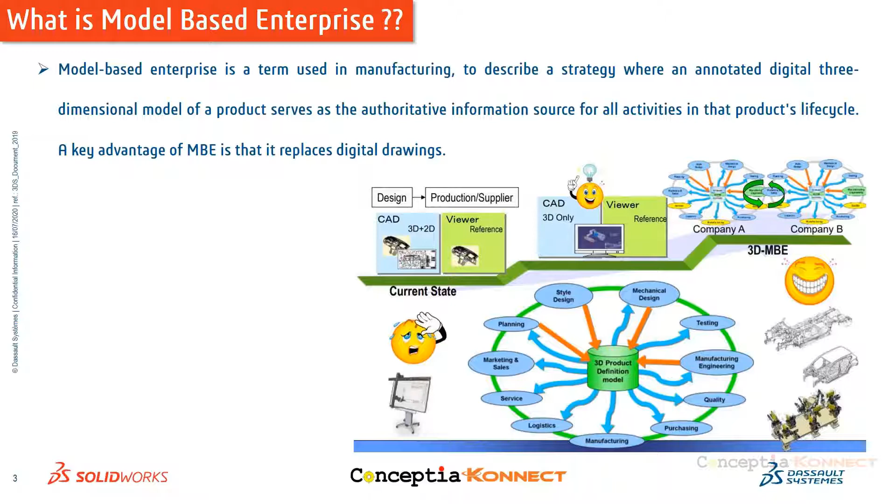So what is the importance of digital product information in a model-based enterprise? What is digital product information? Basically, if you take up your 3D model, what you're designing, the basic process is like this: say you take up a product design process, you're going to prepare a 3D model. Then once it's done, you're going to do some kind of drawings as well, which is digital product information. But what exactly is digital product information?

Whatever you're going to put onto your 3D model, rather than creating a 2D drawing or drafting or engineering detailing, you can right away put all this information in the form of detail into your 3D model itself. So this 3D model with all the product manufacturing information can be digitalized and taken forward for different processes. You can reduce a lot of time here.

How can you reduce the time? Let's consider an example of a design department. Say there are a couple of people, one working on modeling and one working on detailing. Rather than invest money on a couple of people to complete tasks on time, what we can do is have the modeling guy, the designer who prepares the 3D model, right away embed all the product manufacturing information into the model, making the process more efficient and versatile.

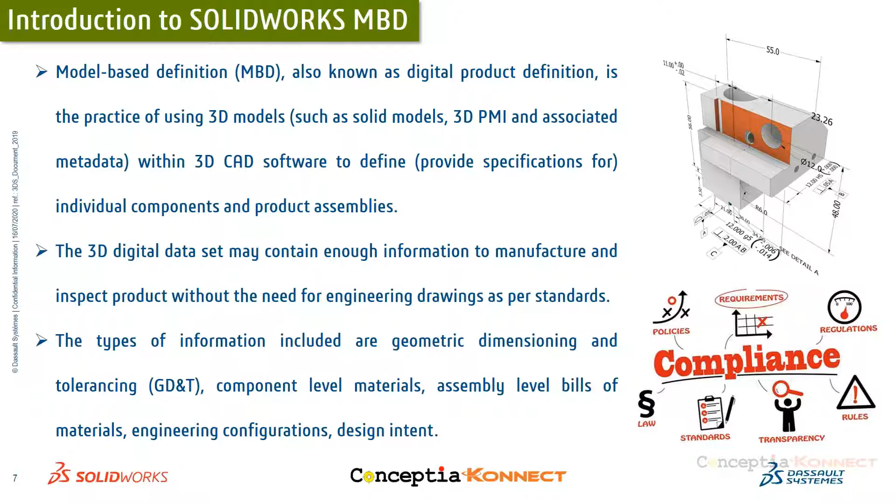So this is one instance where I'm going to show you how exactly we'll be able to create a 3D PMI.

With the automatic dimensioning scheme what we have here, we can select the parts datums considering how it has been assembled, and also constraining its degrees of freedom to ensure that we grab up the information that is required from a model just by selecting the features with a single click.

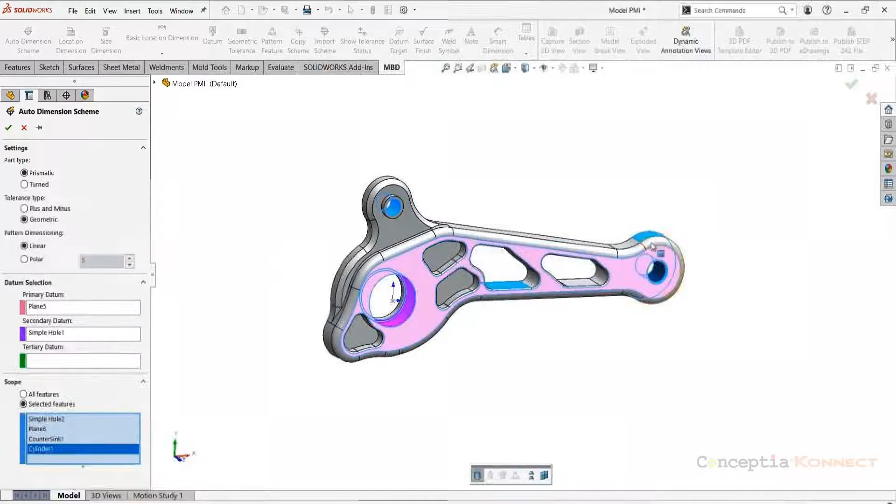As you can see here, when selecting the datums, and if you just click OK, all this information with the help of a GD&T is generated.

You can capture this in the form of 3D views, which can give you a high level of engineering detailing with all the cross-sectional details and all this information as well.

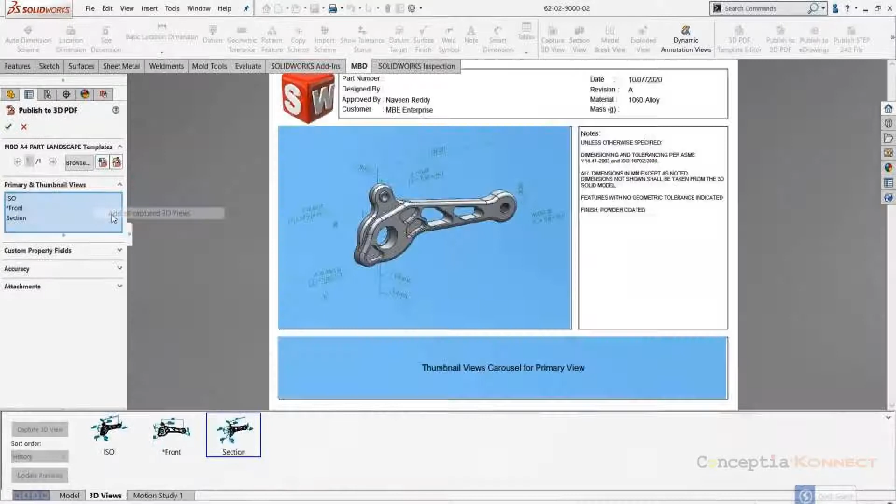Once you have done it, you can publish it in the form of a 3D PDF, which gives you information on how exactly the manufacturing notes have been added, what are the custom properties that we have taken into consideration, and what are the different views that we've added.

If you come to the custom properties, you'll be able to even make traceability as well, where you can check who has designed it, who has verified it, what is the part number, what is the project number.

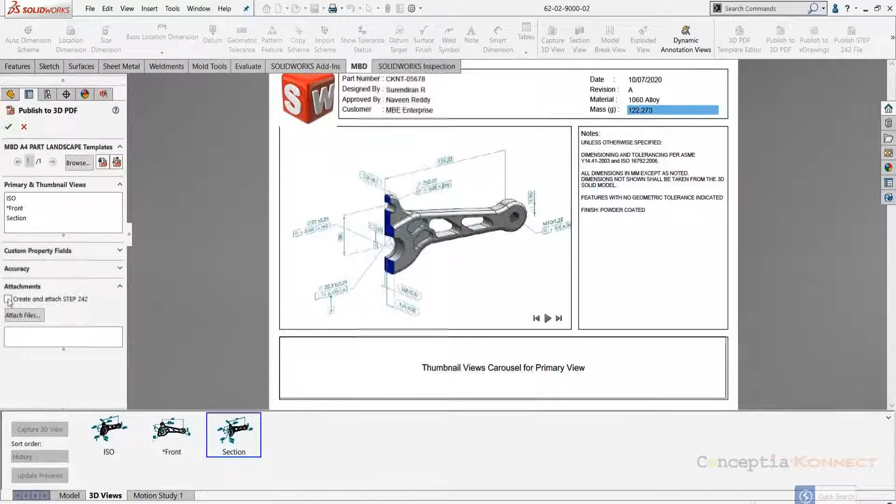All this information can be easily brought in, and of course it is not only limited to that. You will be able to even attach a STEP 242, which is an industry standard based format, which can be helpful for you to communicate with the further process as well.

So it can also give you a visual cue with the full screen mode as well. This is how you'll be easily able to generate the things.

The one more way is, for example, if you have an eDrawings viewer that is available with SolidWorks, you'll be able to easily open the 3D annotated model that you have here. As you can see, I'm just opening this model here.

You'll get all this 3D product manufacturing information on your screen easily. With this, what you can do is switch to different styles.

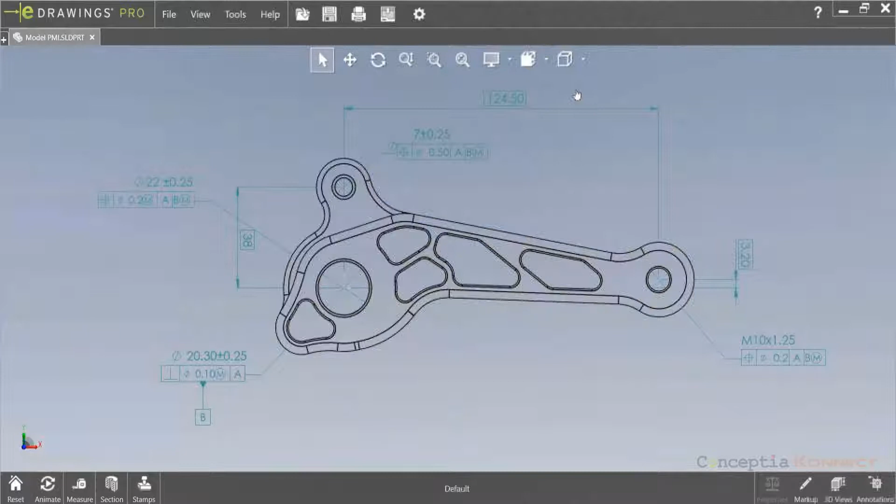Not only with this, say for example, if you want to make some kind of design review or something like that, it can be digitalized, where you can see I'm adding a comment saying design change required. Once you have done it, automatically you can place the arrow mark where exactly you want to place it.

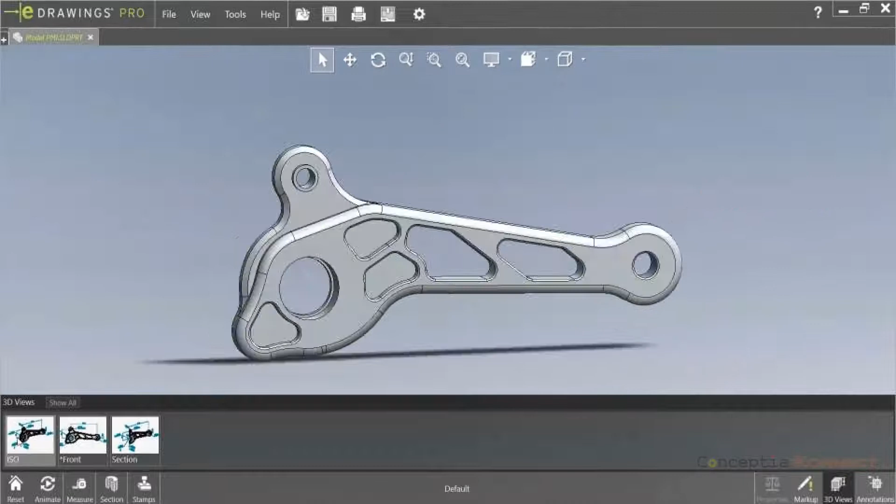Once you have done it, whatever 3D views that you have generated in your model based definition can be replicated into your eDrawings, making sure that you can operate everything on your tabs or computers as well, rather than using papers.

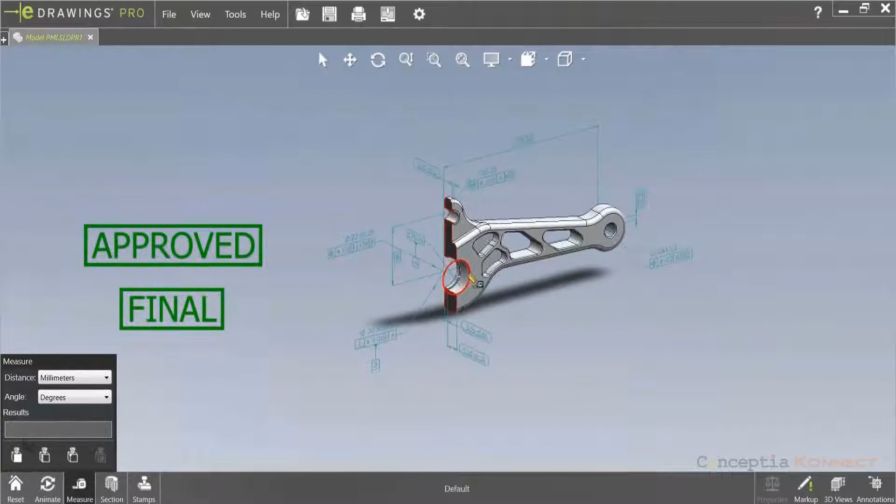And of course, if you want to add some kind of stamps, like it might be for design reviews or approvals, even that can be quickly done. At any point of instant, if you want to make some measurements, it can be done easily.

That is all about how SolidWorks MBD can help us define 3D product manufacturing information onto a model, and how we'll be able to communicate it—whether with respect to e-drawings, 3D PDF, or STEP242. All these are industry-specific standards. SolidWorks offers provisions wherein you can easily export using the direct exporting options within the interface.

Now let's see how SolidWorks MBD is going to power a model-based enterprise. If you take up this chart, you can see there are 5 different divisions. The first is the model-based enterprise at the top, followed by what it's about—starting with model-based definition, MBD.

MBD gives you information regarding your product, like manufacturing information, GD&Ts, 3D annotations, general profile tolerance, or concentricity. All these GD&T symbols are there.

Once you've defined all these things, the next process is about communication—whom you're going to communicate with. You're going to send it to different departments, for design reviews, or for example the semantic STEP242, as I showed you.

It's going to be helpful for you in the technical documentation process as well. E-drawings can give a visual cue wherein your manufacturing people at the floor can easily understand all the 3D models with the PMIs much better. That's how the communication gap between design and other departments is bridged, using suitable sharing formats to get all the necessary information.

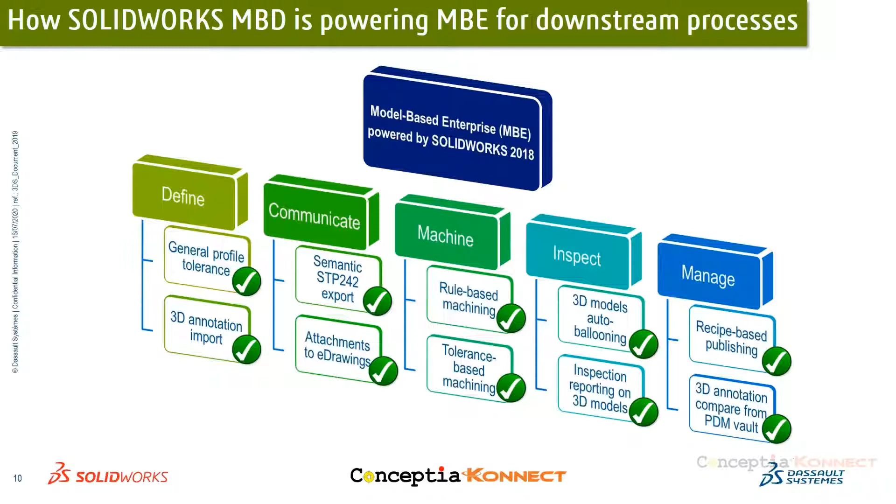So these are the solutions we have from SolidWorks for model-based enterprise. What exactly is it? First, let's see SolidWorks Simulation.

I didn't tell you anything about SolidWorks Simulation in the previous slides, but if you take up the concept of model-based enterprise—or if you're trying to implement it in your organization—it's very important that even before carrying out the rest of the operations in the product life cycle, you need to validate your product.

The SolidWorks simulation can right away be associated as an add-in, followed by which once you have validated, you can go to the manufacturing with SolidWorks CAM, and once you have manufactured, you can go with SolidWorks Inspection for inspection processes like QA and QC process and the product control area.

And once you have done it, you will be able to create technical documentations, for example assembly instructions. There are organizations across the globe wherein they share the product manufacturing information in the form of a .smg file, where you will be able to gather information in your technical communication tool as well, which can help for both manufacturing and assembly.

Finally, e-drawings and STP files can easily be associated with SolidWorks, wherein it can communicate things in a much clearer way. Finally, SolidWorks PDM is a tool which gathers all this information and keeps it in a single area, with information on all the versions and revisions that we place for a product at any stage across any process in the product life cycle.

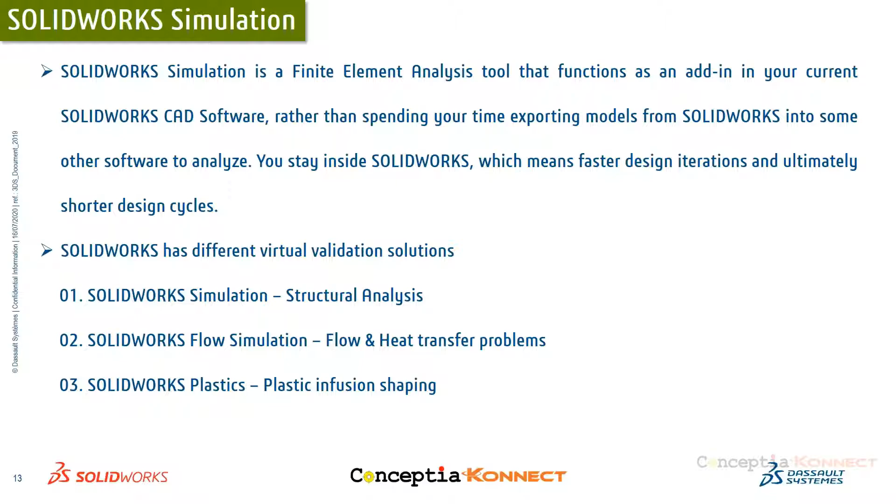Let me take you through a segment with a small example of how exactly we can perform topology optimizations or design optimizations, to ensure how SolidWorks can be a great tool for you to automatically optimize your shapes based on the strength and weight criteria, and get the necessary stresses and strength factors induced in your model during its operation. So this is one example here.

This is the same example which I showed you earlier - here you can see the link part I showed earlier. So here in SolidWorks simulation is an add-in. I'm going to perform a topology study here. Let us see how exactly I'll be able to optimize it without any manual intervention.

Here we'll be able to define all the restraints and constraints required for analysis. So at any point, if you change the model in your design interface, automatically it will be updated here within no time.

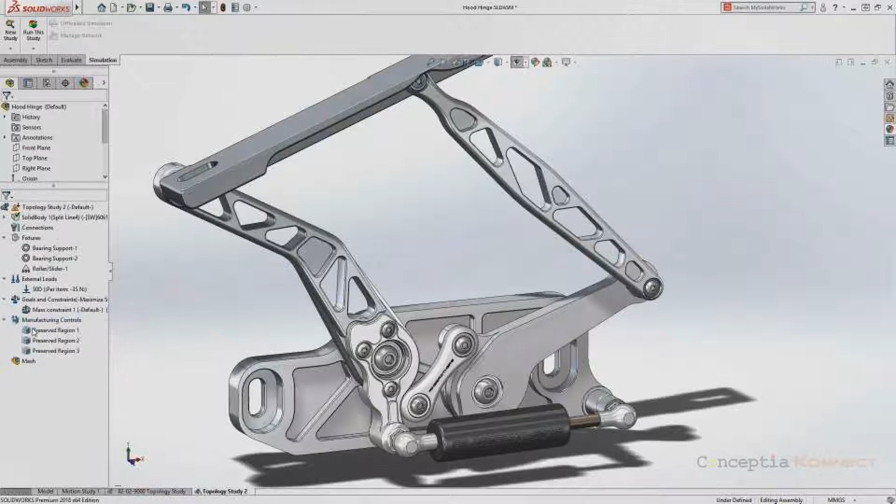And again, if you take up these different types of options for topology optimization, say for example, if you want to maximize the strength of this arm, even that can be done. And of course, if you want to preserve some regions into your model, making sure what kind of result you are expecting here as well.

The tab you're seeing down is the design optimization tab, wherein you will be able to get the load case study, the different types of loads, and finally you can see this is the optimized shape that we have here.

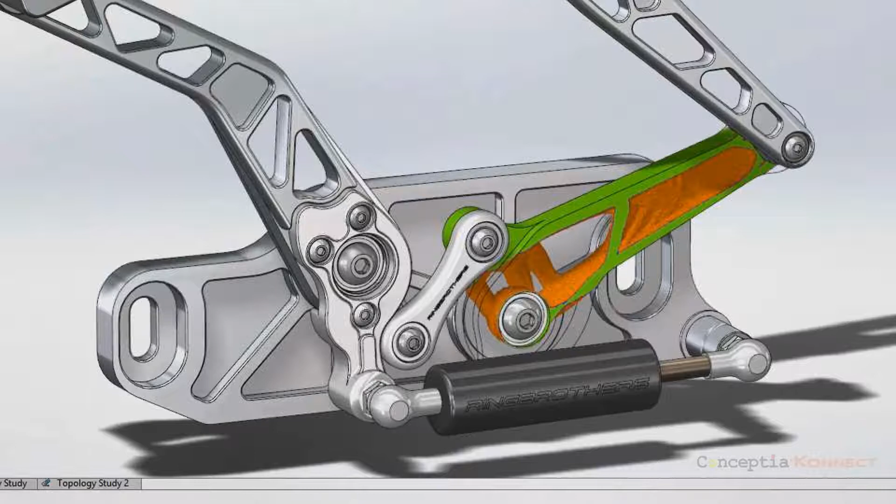And this can be shared in the form of a new configuration in your SolidWorks CAD interface, making sure there is no requirement of a new model to be created. And of course, finally, once you have done this, you can see with all the color coded depiction, you'll be able to find the stresses and different strength factor results as well.

So next, moving further, is about SolidWorks CAM. This is the manufacturing solution that we have here. So even though we know that we have a 3D model, we'll be able to generate the CAM program. But the concept is not about generating the CNC program here, it's about how you're going to maintain the tolerance and precision.

So with SolidWorks CAM, we have a concept called tolerance-based machining. Tolerance-based machining basically grabs all the 3D product manufacturing information and tolerances from your 3D model right away. It tries to extract all the machinable features available on your model, and from this information it automatically generates the programs. Let's quickly take a look at how SolidWorks CAM can be a great tool.

Also, I'd like to give insights that SolidWorks CAM is a 2.5 axis milling tool and also a 2 axis turning tool, where you'll be able to perform all the manufacturing activities like generating CNC programs and creating process plan sheets, and of course making sure that you have an integrated interface for CAD and CAM as well.

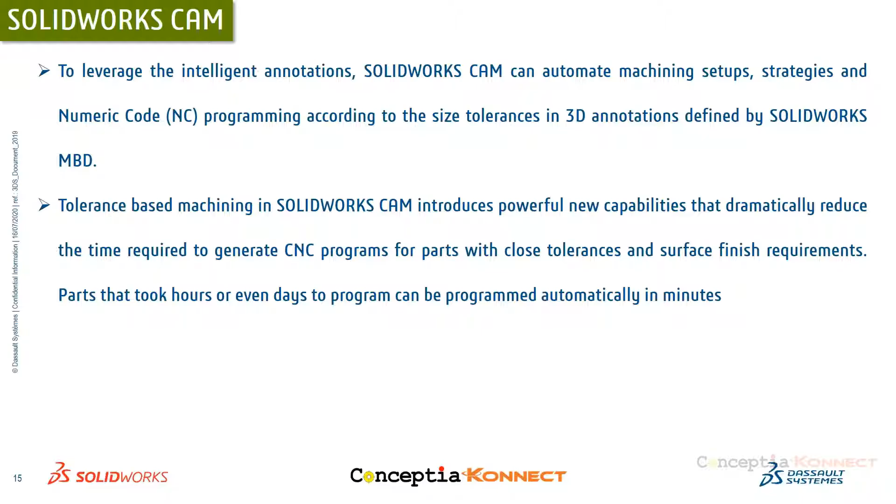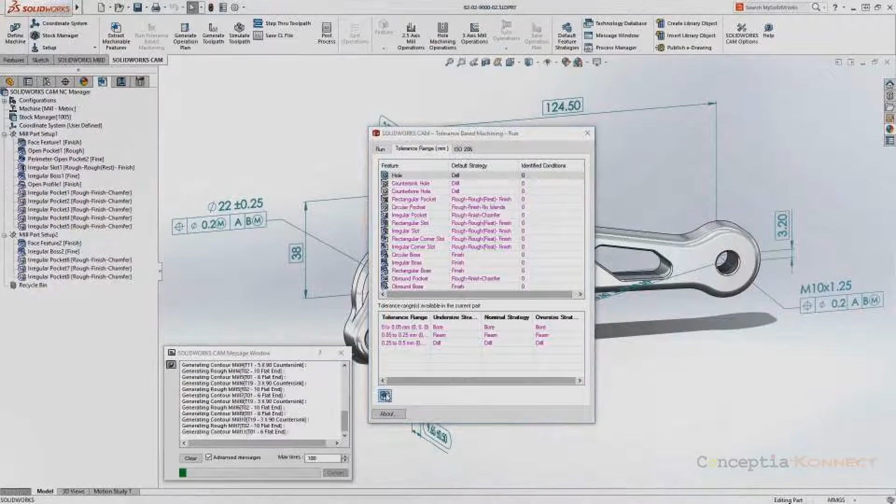So in this segment, say for example, I'm going to pick the particular link part here. I have defined all this 3D product manufacturing information here. SolidWorks CAM, being an integrated interface, has an option called run tolerance-based machining, wherein with a single click, SolidWorks will automatically extract all the machinable features. You can see all these necessary features have been extracted onto the CAM feature tree.

At any point, you can see I'm going back to the CAD interface. I'm going to change the type of fits that is required, and not only that, I'll be able to even change the other dimensions with different types of tolerances as well. You can see how easily it has been reflected here.

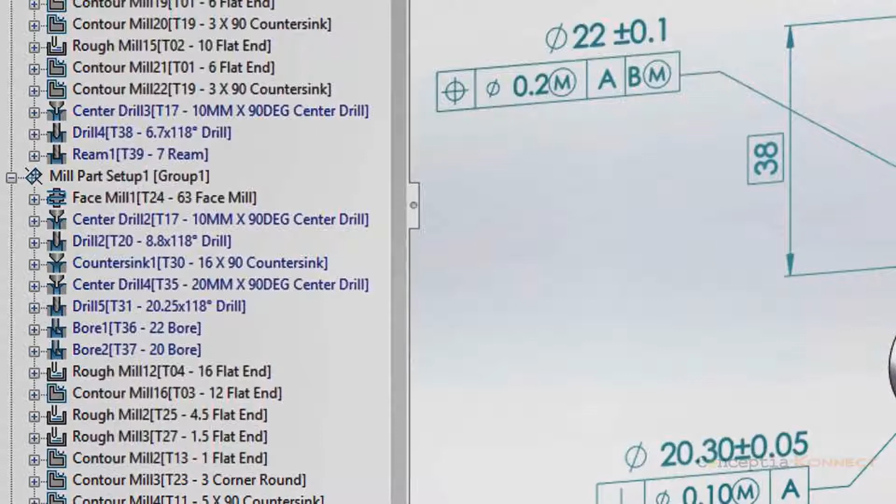And again, coming back here with the direct integration we have for CAD and CAM, SolidWorks will automatically be able to extract all this information, and easily grab the tools required for the toolpath simulation as well, wherein all the toolpath simulation can be easily performed to ensure you get the product right without any glitch.

So next is about SolidWorks Inspection. As you all know, once your manufacturing is done, how exactly are you going to inspect your product? If you take up an inspection process, it serves two purposes: one is product control, and one more is process control.

SolidWorks Inspection is a product control tool which helps us generate balloon drawings, and of course the first article inspection reports as well. So it is not only limited to parts here.

SolidWorks Inspection acts as a powerful tool for both SolidWorks parts and assemblies, wherein once you try to define your 3D product manufacturing information in MBD, the same can again be integrated on the same interface for creating ballooning, and of course you'll be able to generate all this necessary information as well.

And SolidWorks Inspection being a standalone application, it is not mandatory that you need to have SolidWorks installed. You'll be able to work on SolidWorks Inspection even without SolidWorks. You'll be able to import different types of CAD parts, like PTC Creo parametric files, CATIA part files or CATIA drawings, Creo files, or 3D XML. All these files are accessible into this SolidWorks Inspection standalone application environment.

Let me quickly take you through a segment wherein we'll see how you'll be able to do the ballooning and report generation with a 3D model. So again, considering the same example, the link part, let's open this particular part here - the SolidWorks Inspection is again integrated onto the same interface. You can see here, this is the CAD interface, and we have different views here. At any point, if you want to create ballooning, you can go ahead and start with a new inspection project here.

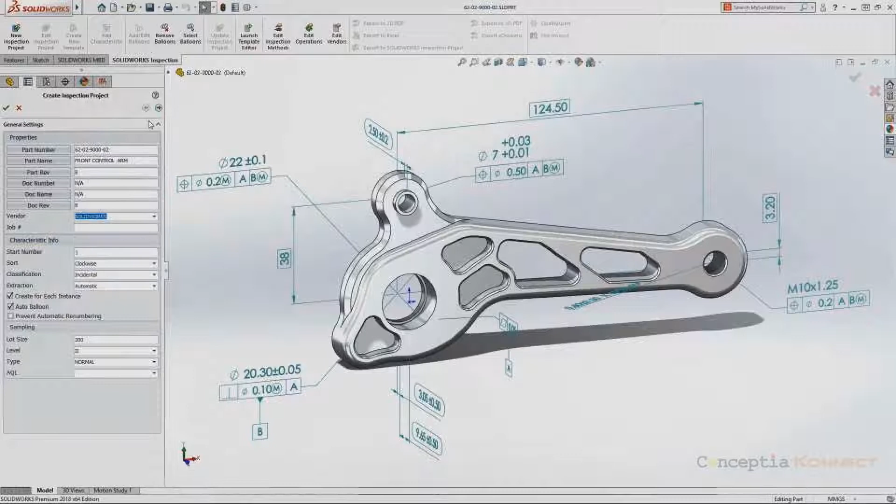Here we will be able to customize it according to different industry standards, and different information can be added, like different types of vendors, operations, manufacturing process. All this information can be easily gathered. As you can see, the balloons are created within an instant of a minute.

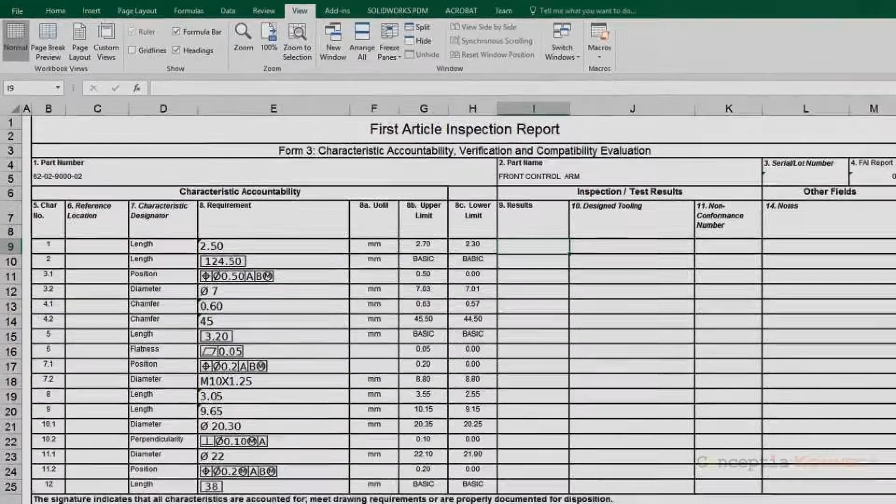Once it has been done, at any point of instant, if you change any dimensions in your CAD, automatically it will be reflected into your inspection as well. And of course, once you have done it, you'll be able to easily generate your first article inspection report as well.

So next one is about SolidWorks Composer. SolidWorks Composer is a technical documentation tool.

If you take up a model-based enterprise, few companies don't want to share their step files or 2D drawings with their tier 1 suppliers or vendors. So at that point, people who have tried to implement the model-based enterprise try to share the data in the form of graphical content. This gives you a lot of security, wherein other people cannot misinterpret anything on the design intent.

So all this information and the views that you have captured in your model-based definition can be right away transferred into your SolidWorks Composer in the manufacturing perspective again. And it's not only limited to that. SolidWorks Composer is a beautiful tool that helps us create really interesting and interactive technical documentation like product manuals, service instructions, or assembly instructions, helping the people on the floor understand more about the design part.

This makes the process more effective and reduces a lot of time. To be more precise and clear, the thing I would like to tell you is that you will easily be able to gather all this information from SolidWorks MBD into SolidWorks Composer within just a click, and you can see how easily you will be able to interpret all these things.

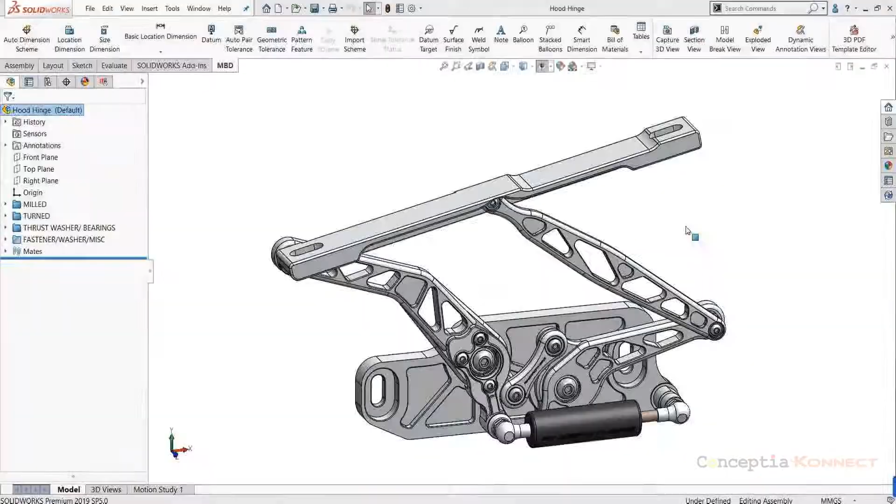Let me quickly take you through a segment where you can understand how we have an interassociativity between SolidWorks Composer and SolidWorks MBD. Going back to the same example, if you take up this particular part, you can see I've defined all this 3D modeling information here. Right away you can go to the 3D views tab where you can see all these 3D views being generated now.

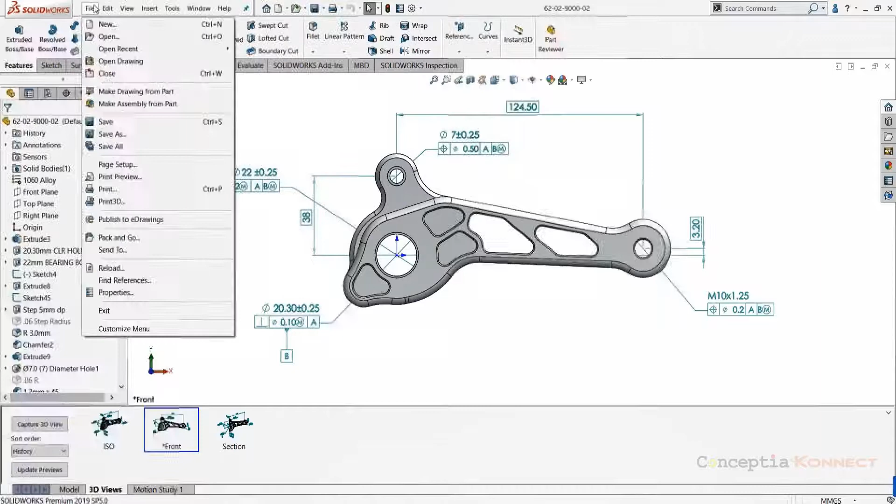So for example, at any point of instant, if you want to change it into a graphical content to share with your tier 1 suppliers or vendors, SolidWorks has direct integration wherein with add-in options you will be able to export it in the form of a .smg file as well.

Once you save this in the form of a .smg, this is the SolidWorks Composer interface wherein you can open that particular file. If you open this file, automatically all this information that you have gathered into your 3D model, all this product manufacturing information, will be right away available here.

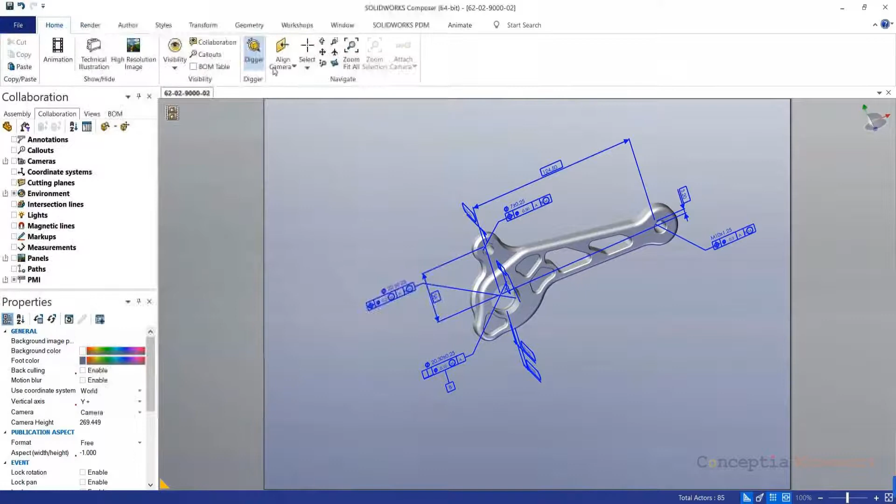You can align it over different places, and if you go to the types of views, you can see the front views, side views, sectional views - all this information can be right away gathered here. And if you want more information on the 3D PMI, you'll be able to have traceability for all that as well.

If you want to create some kind of assembly instructions, you can see for the same model I have taken, you'll be able to create exploded views with bills of materials, and gather all the information for the complete model as well. As you hover over the single parts on your BOM, you'll get clarity on the complete information. And it's not only limited to that.

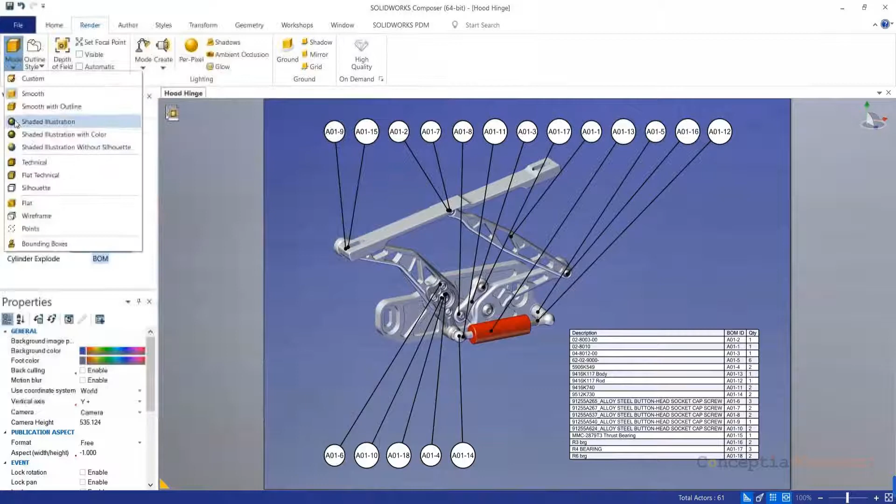If you go to different rendering styles, you can see all this information on the model can be viewed in different perspectives, like in the form of a silhouette, wherein you can get only the 2D outline. And if you go to other kinds of things like technical illustrations, you will be able to generate a scalable vector graphic image wherein it can be directly clubbed into your websites, which can be easily opened with the help of your browsers - a graphical content that has been prepared and can be easily exported into your browsers.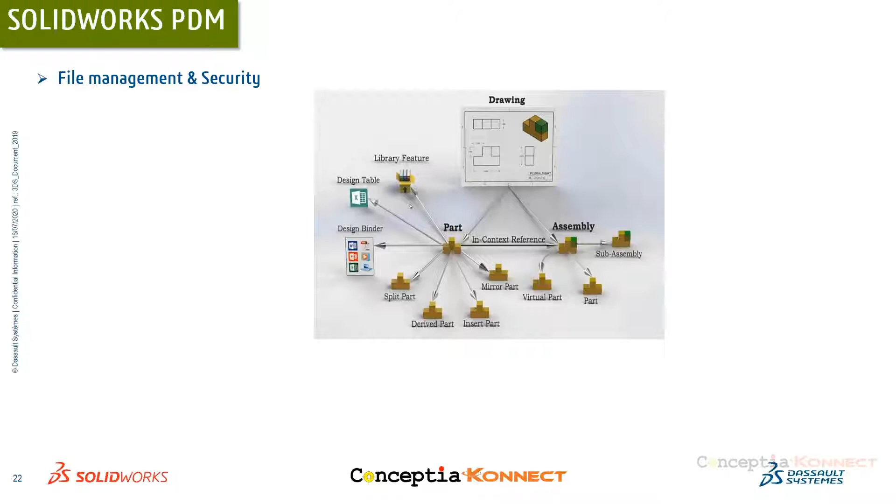Next, you'll be able to easily create workflows and approvals. Rather than doing manual processes for approvals and workflows, you can manage this information electronically, getting electronic approvals, and workflows can be created for different departments across your company, connected across different units as well.

Next is the communication process, one of the most important things. You'll be able to easily communicate across the global network, collaborate between different departments or units of your organization, and organize and manage design data.

And if there's any replication happening, you'll be able to track this data, like the history of the file, making sure you know what changes have been made and how this can be overcome if something needs to be replicated back to a particular stage.

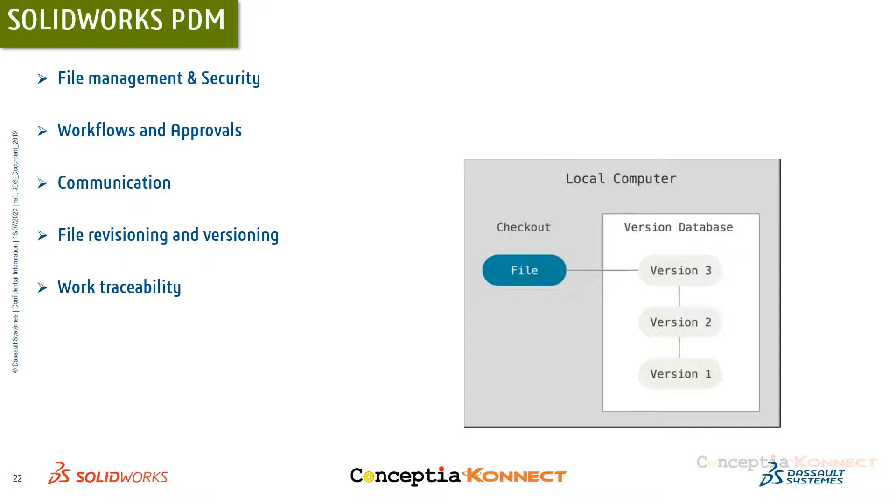So finally, it's all about file revisioning, as I told you, and work traceability—one of the most important things. For example, if you have 10 designers in your organization and want to track the projects or design activity, or any department's work, you'll easily be able to trace the work they've done. And if there's any misinterpretation happening, you'll get all this information within just a click.

So finally, coming to the advantages and benefits. What can we understand from this? As we saw, with this implementation of a single 3D annotated product manufacturing information model, we can create so many things, which ultimately reduces time to market. You can save a lot of money in production, whether it's with respect to investments in tooling design or fabrication activities.

And for technical communications, by implementing this concept of model-based enterprise, you can save a lot of assembly hours, avoid a lot of rework, and have a streamlined process, ensuring better collaboration in engineering changes between different departments of an organization. With design-integrated simulation, at any instant when you make changes to your design, you can easily replicate them into your virtual simulation interface, making sure your designs are perfect even before manufacturing.

And finally, managing engineering data is more feasible, where SOLIDWORKS PDM can collaborate and integrate all these interfaces on a single user interface, where you'll be able to track all this work that you have been doing, and what are the different revisions and versions that you are going to prepare, and how exactly the work traceability can be found in your organization.

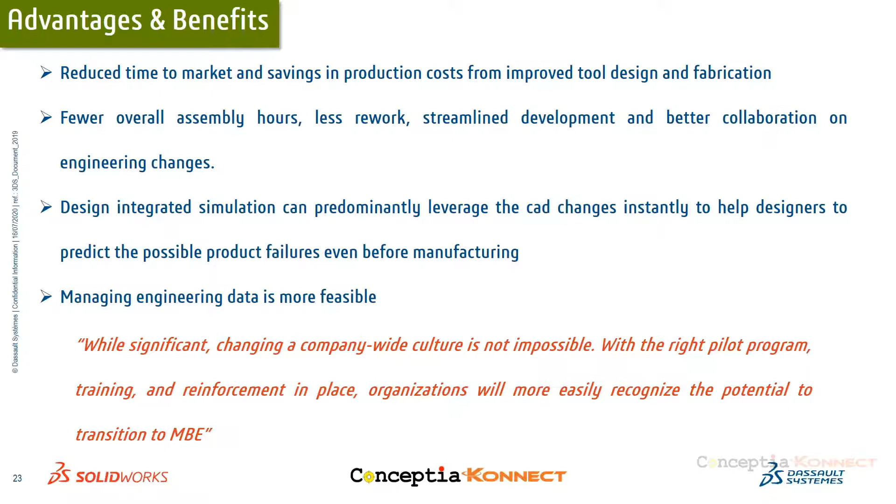So this is the general slide wherein I'll give you insights about the SOLIDWORKS design to manufacturing ecosystem. From design, we have SOLIDWORKS CAD. For manufacturing, we have SOLIDWORKS CAM. For the electrical perspective, we have PCB and also SOLIDWORKS Electrical. For validation tools, we have SOLIDWORKS Simulation, Flow Simulation, as well as Plastics.

And in the product quality control domain, we have SOLIDWORKS Inspection, which can serve you for preparing balloon drawings, and you'll be able to easily create first article inspection as well. And of course, SOLIDWORKS MBD, which was the major topic for today, can easily create 3D PMI with industry-specific standards, integrating all these applications on a single user interface.

And finally, SolidWorks PDM and Manage are the data management and project management tools that we have in SolidWorks. Also, Exalead OnePart is the advanced part search tool we have, wherein we'll be able to get all the information with respect to the standard components across this globe.

SolidWorks Composer can help you create technical documentation. eDrawings is going to collaborate all this information from SolidWorks MBD, from the 3D model, and all the manufacturing information as well. SolidWorks Visualize is a tool that helps you in the product styling process, getting your products faster to market rather than facing delays due to traditional photographic approaches, to create immersive, interactive technical content.

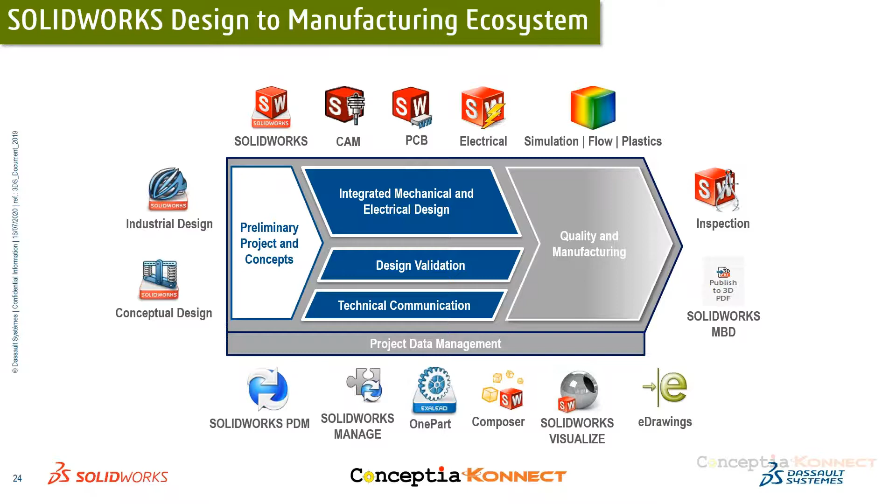So the agenda of today's webinar was this: integrating all these applications on a single user interface is going to drive the process more faster, and help you drive productivity to the next level.